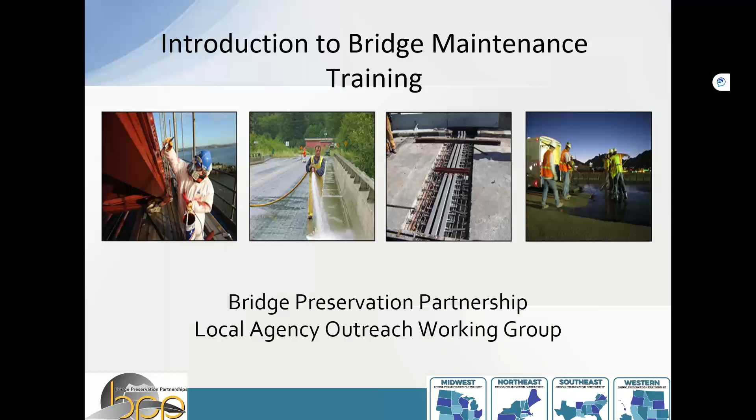I guess I should start with apologies for the last attempt at this. We had actually set a goal to break the software, and we didn't think we would actually achieve it. We had enough attendees log on last time that it exceeded what the software could handle, and it shut down. So we have a new platform today, and we should be off and running.

Just some housekeeping: as you've probably noticed, you do not have the ability with this software to unmute yourself, so we'll have to do the old texting or typing questions into the chat pod. There is a chat window and also a question and chat pod. We'll try to keep an eye on both, but using the question pod will probably help. You can see there's already quite a few in there.

The purpose of this training is to engage at the local level and hopefully provide topics that are of interest to you. I'm going to cover a lot today, pretty quickly, so I'd suggest you think about other topics you'd like to hear about, and we can bring those up later.

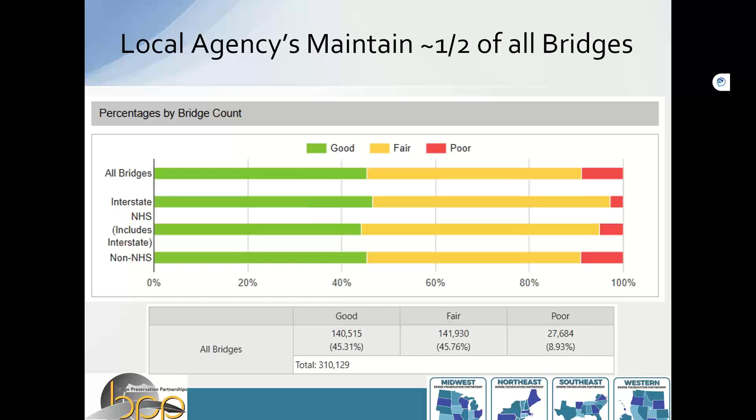If you look at the bridge condition trends for local agency bridges, this is for the NBI ones, so the 20 feet and greater. I should stop with that. The numbers I showed of the 300 plus thousand, that's only bridges over 20 feet in length. So if you have something that's slightly less than that, it doesn't even get counted into that number. But as an agency, you still are responsible for figuring out how to maintain it.

The number of fair condition bridges has steeply inclined, and the number of good conditions has stayed up there as well. So basically, we've added a lot more bridges to the inventory, and a bigger population of those bridges are in good or fair condition. So green is good, yellow's fair, and red is poor. Those colors repeat a couple times here.

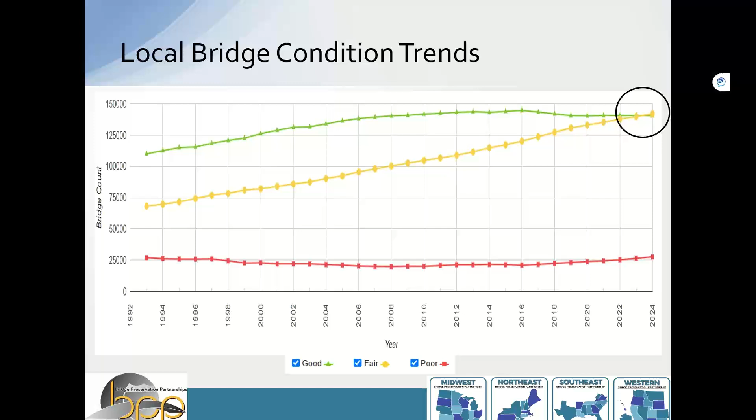So I'm going to define maintenance in just one second. Probably a lot of folks on this call have a clear understanding of it, but I find some folks don't. Generally, when we talk about preservation or maintenance, we're talking of just keeping what you have in good condition for as long as possible. We're not talking about taking those bridges that are in very poor condition and fixing them, because usually a new bridge is what you get with that.

So this graph helps you think about what bridges are my good candidates for maintenance and preservation. It's usually those in good or fair condition where they're worth saving. They don't need some kind of heroic effort to keep them in service for longer. As you work your way down that condition trend, you might still want to save the bridge, but it might be more of a large scale rehab project where you're having to touch most of the bridge and really put more work to it.

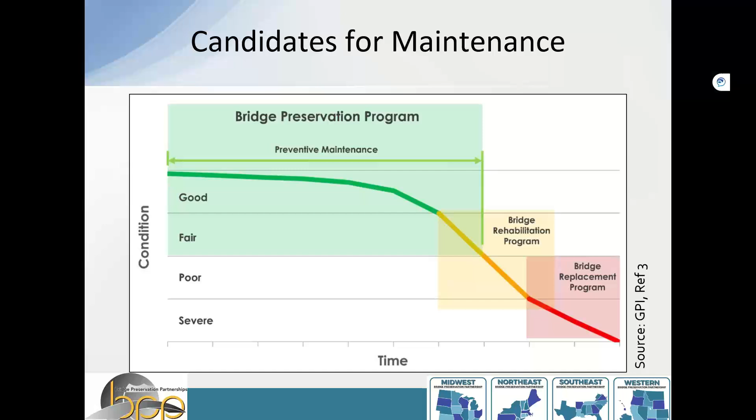So as I alluded to there, what's the purpose of maintenance, right? Maintenance is not all of the wish list stuff, as I like to call it. Maintenance is not, well, we need a wider road to fix congestion, or we need more ADA ramps, or more mass transit, or more rocket ships to the moon. I swear there's lots of different things people look to maintenance to address for us. That's really not the purpose of maintenance.

Maintenance is to keep what we have in as good a condition as we can for as long as we can. And when I try to relate maintenance to folks outside the field, I find using a car analogy is really helpful, because when people think of bridges, they don't think of maintenance that often.

The bridge was built, it's there, and then someday it will be replaced. But in between those two activities, there's a ton of work that needs to happen. And if you use a car to break it down to folks, a lot of them will get it. With a car, maintenance is your oil changes, your washing, your tire rotations, all those things that just keep the car in service, right? They're not improving the car, they're keeping it in good condition as long as you can.

And then you go to the other side there, your rehab is that engine rebuild. When you're not maintaining your car properly, you have all these consequences of expensive things you have to do. And then you go all the way to the other end where you have your car replacement, where you just go buy a new one. You could technically skip the maintenance and rehab step if you had the money to do so, right? You could buy the car, drive it around for as long as you can, do zero maintenance on it, and then once the tires wear out or the engine explodes, now you're going to replace it, right?

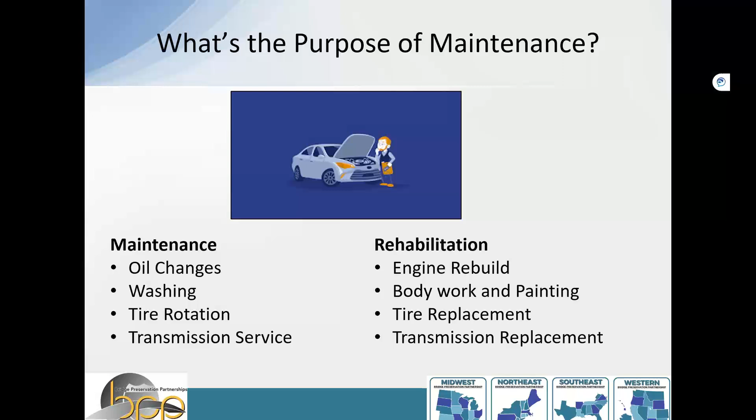And a lot of times folks look at our bridges that way, where it's like, I built it and I'm going to wait till I replace it. What do I need to do in the interim? There's a lot that needs to be done, so we'll cover quite a bit of it today. So when we talk about bridge maintenance, here's a laundry list of some of the things that fall into that category. I'm going to hit quite a few of these during today's overview. This is high level, but we're going to give you a lot of the tools you need to start some of this work now, and we're also going to point you to resources where you can find more details on how to perform this work.

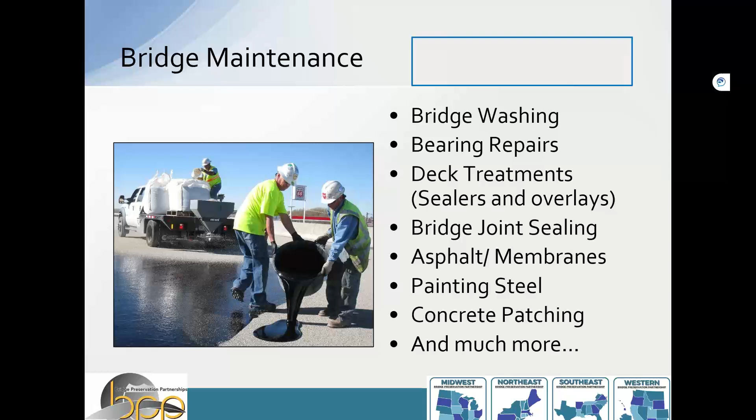But bridge maintenance is simple. You're washing the contaminants off the bridge. You're maintaining your bearings. You're doing deck seals and treatments and overlays to maintain the riding surface on the bridge. You're going to maintain those joints on the bridge deck that keep water and debris from getting down below. A lot of bridges have asphalt or membranes; you're going to take care of those. Steel needs to be painted to keep from corroding, so painting is a big part of maintenance. Concrete patching, bridge drainage maintenance. There's tons of different activities that fall into maintenance, but these are some of the more common topics.

So a lot of the content we're going to share today is coming from these preservation pocket guides. You'll see that there's quite a few QR codes throughout. If COVID had one silver lining, it's that these QR codes have become a little bit more useful. You can scan these and it'll take you to these preservation pocket guides. All these links take you to our organization's website, the TSP2 or Bridge Preservation Partnership. We're going to go into more depth on these pocket guides, but they're a very, very useful tool.

These guides were developed by a lot of the folks that I listed off in that first slide: folks that make the products, folks that talk to owners about how to install the products, and folks that actually do the installation, all working together to put together a guide saying we just want these things to work, right? The person that sells the product doesn't want it to fail early. The person that installs it doesn't want it to fail, and the person that owns the bridge doesn't want it to fail. So putting these three together really makes a difference on extending the life of the bridges, or getting good quality products out of what you install.

So the intent of these guides is really an installation guideline. It's meant for the person that's out in the field. It's going to list equipment and tools, some limitations and considerations, like when should I do this kind of maintenance activity? It's going to talk about if you need some training, although a lot of these are items where you could just grab a crew and start working right away. If there's any kind of technical support, some activities where maybe you need some engineering involved, these guides will try and flag it for you. And then some quality control considerations.

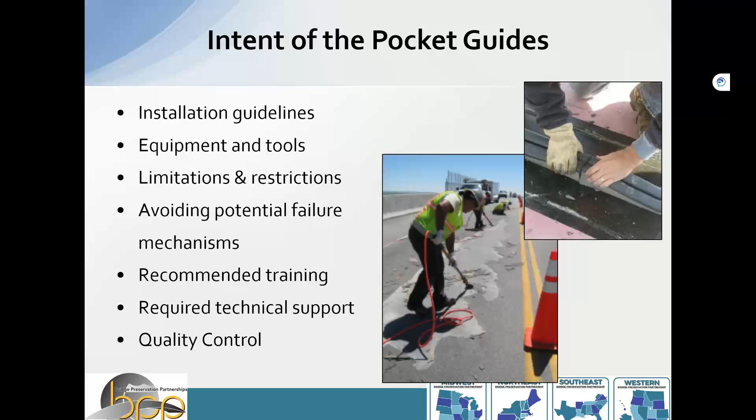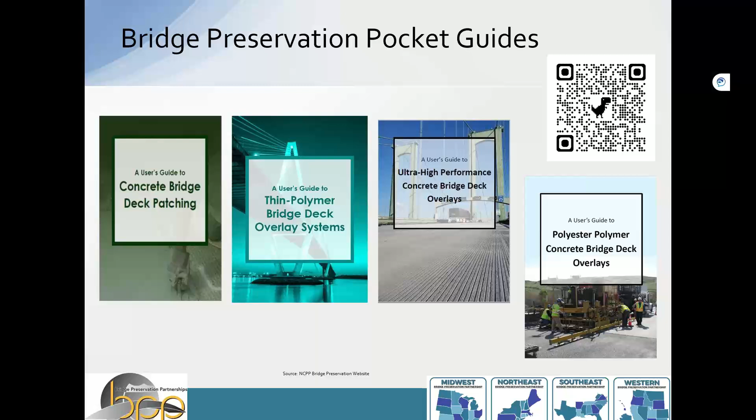I know I left quite a few off, but if you scan that QR code, and I think it'll show up a few times before we're done here today, it'll take you to where you could print these out. You can do them in PDF and have that information with you and take it out in the field as you're either inspecting someone else doing the work or you're doing the work with your crew.

You can also download it. Some of these, not all of them I think, have Android or other applications that are available to download and be interactive, where you can have checklists and different things that you're using. They're really a cool resource.

This is 100% free. In fact, everything I'm telling you today is all free, right? We're not trying to get any money out of anyone or sell anything. I don't own stock in bridge preservation. We're just trying to spread the word, right? A group of folks put a lot of work into making these, and we just want you to know that they're available.

So we're going to walk through some of these. Bridge washing, right? This probably sounds like one of the simplest activities that you can do. It has a huge impact on the service life of your bridges, particularly in regions where you have a lot of de-icing salts or a lot of debris that accumulates on your bridge decks. Washing that off can make a big difference in how long it lasts.

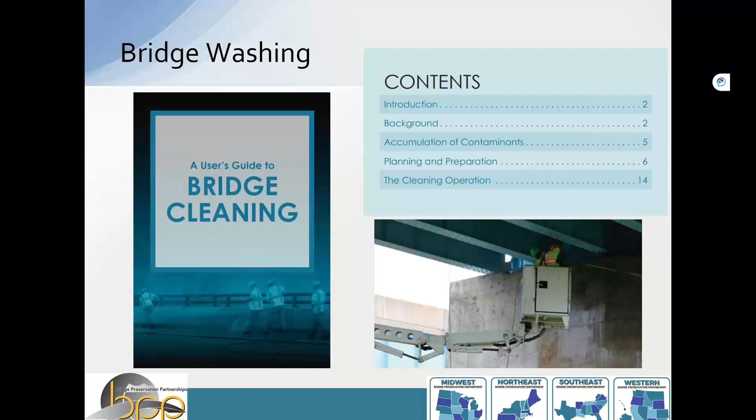The benefits are that flushing and washing reduces the potential of those salts or de-icers getting into your bridge deck or your beam ends or other locations. It's essential just to get the debris out for a lot of your bearings and joints to work, right?

You get all that dirt and rock packed into where your bridge joints are, and I've actually seen where it's either broken the bridge itself or broken some reinforced concrete paving coming up to the bridge, because when it gets warm, the bridge wants to expand, and it creates a tremendous amount of force if you don't give it room to do so. Cleaning can also help with your steel coating systems, keeping those clean as well.

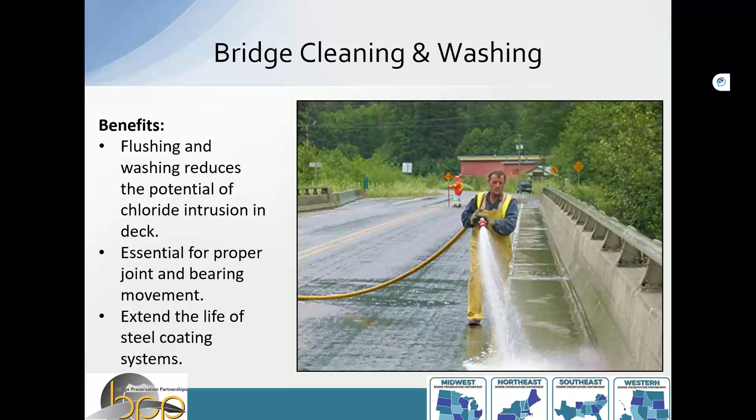So some of the things to focus on are decks, joints, curbs, and rails, that area where you're applying a lot of the contaminants directly. But then also look underneath those joints too. You have your abutments, your beam seats, and your bearings, right? If you kept your joints watertight forever, you wouldn't have any issues down below. But the reality is that joints end up leaking from time to time, so you can get a real concentration of contaminants at those areas. So it's something to look at also.

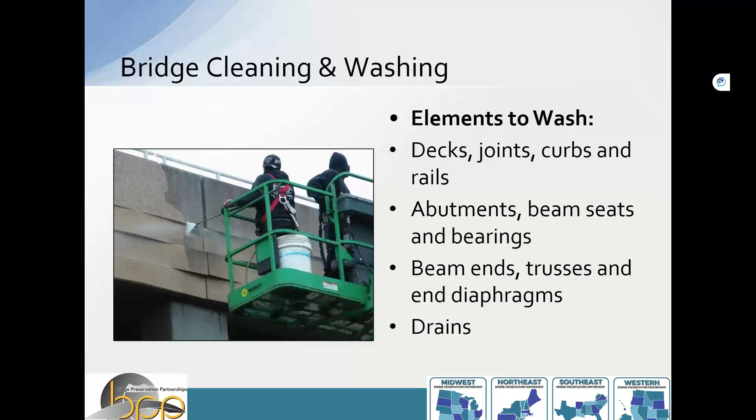It goes through some of the considerations, right? If you have a ton of debris on your bridge, you're probably going to need to remove some of that with hand methods first and collect it before you flush it. That's usually an environmental consideration, and so there are some environmental regulations that you need to think of.

I look at bridge cleaning, at least in the Northwest, as being a real success story for this preservation partnership. I used to work at Oregon DOT, and attending the partnership, we would hear from all the other regional partnerships.

Washington did this great study where environmentalists had kind of shut down, through the permitting process, the ability to wash bridges. They didn't quite say you can't—they said you can wash your bridges, you just need to collect 100% of all the water you use while you wash your bridge. Well, that turns it into a pretty significant effort, right? If you're trying to clean off a bearing or beam seat like this and you have to figure out a way to collect all of that water, that's basically telling you not to wash your bridge.

So they did this research study where they measured contaminants. They followed these best practices: picked up all the big debris, then flushed during high flow situations where the stream already had a lot of water going down it. They said, measure contaminants upstream and downstream of us, and if you can tell a difference, we won't do it anymore. That kind of pioneered a program for permitting, saying that they couldn't tell a difference. So if you follow these best practices, you can start washing your bridges again.

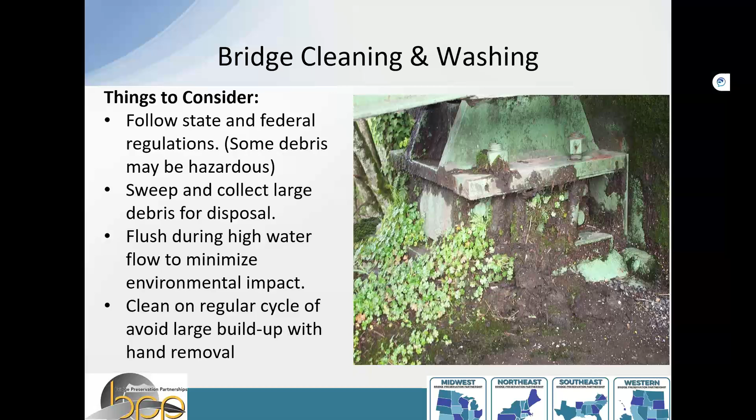So underneath the bridge joints, you've got bridge bearings. There's a really pretty cool guide on this one. I've done quite a few bearing maintenance, repair, and replacement jobs in my career, and I'll say there's really nothing cooler than when you get to jack a bridge up, pull it out, and put it back in. There's just something about lifting something that heavy that's really pretty cool.

This guide's got a lot more considerations to go through, but again, like all the guides, it tries to take you from beginning to end. The whole thing is still only 19 pages, so it's not like they're handing you some crazy research thesis that's not particularly useful. This is walking you through basic steps and considerations to maintain your bridge bearings.

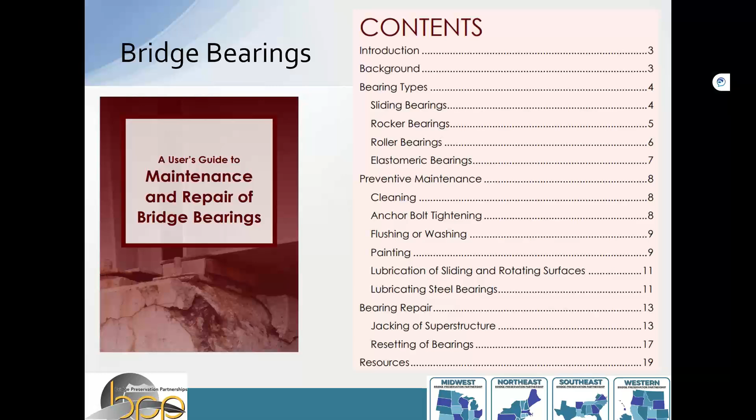So the guide will start with, and we will too, a description of what is going on with these bearings. Up there at the top, you've got your steel beam coming down, sitting on this sole plate, which is then sitting on a sliding plate, which then is on a masonry plate—just a big steel plate that helps spread the load out before it gets back into the concrete abutment or pier cap. This is an example of one that's actually in fairly good condition.

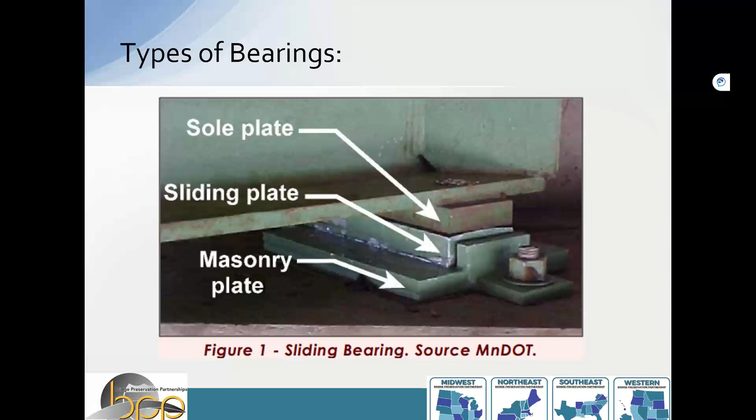The whole point of all this is just to allow the bridge to expand and contract as the temperatures swing. If it's not restricted while it moves, everything works well. If things get bound up or frozen, the forces are tremendous, and you'll actually start to see either those anchor bolts shear off, or you'll see the concrete underneath them go, which can get pretty scary pretty quick as you start to actually fail what's holding your bridge up.

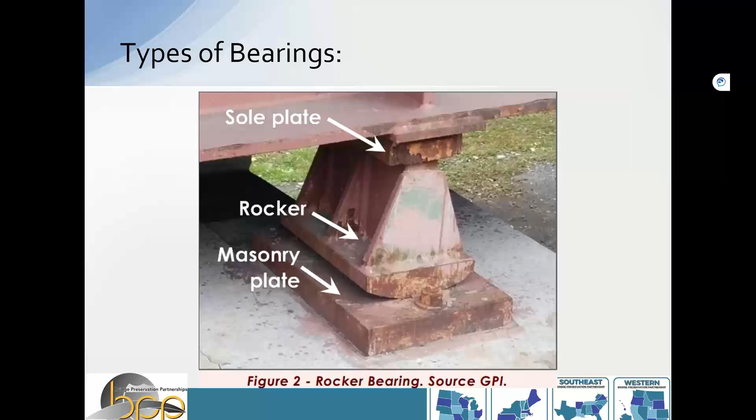Another type of bearing—this is a rocker bearing. So a similar application, but instead of sliding back and forth, this one just rocks back and forth on a pendulum. A different type of bearing system, but trying to accomplish the same thing.

And a roller bearing—another movable bearing system, but this one has a cylinder that allows things to move back and forth on top of it. I could see, actually, this is from the guide—there's a pretty good spall of concrete right above it, you can see where it's that rough end. So I'm going to guess that this one probably had a leaking joint above it at some point, which could have resulted in some damage.

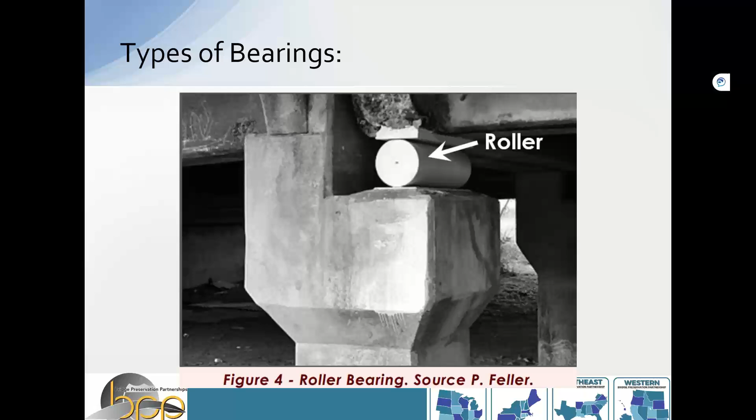So those are your different types of bearings. Cleaning is one of the main things that we like to go after with these, just to maintain them as well as you can.

If you get to do a bearing replacement, it's a pretty good effort. I'm biased, I know it's a cool project to be involved with, that's fun, but if you can just clean it, it's going to be a lot less work for everyone, a lot less cost. That's really the whole point of cleaning, just to keep it from rusting or deteriorating and to keep things moving so that you don't start to break stuff.

Anchor bolt tightening. I actually caught in the chat pod that there was a note that one of those anchor bolts looks loose. So the guide actually talks about that. If you have loose anchor bolts, it could cause damage to other components as well. So retightening those anchor bolts is directed. That's something to keep an eye on.

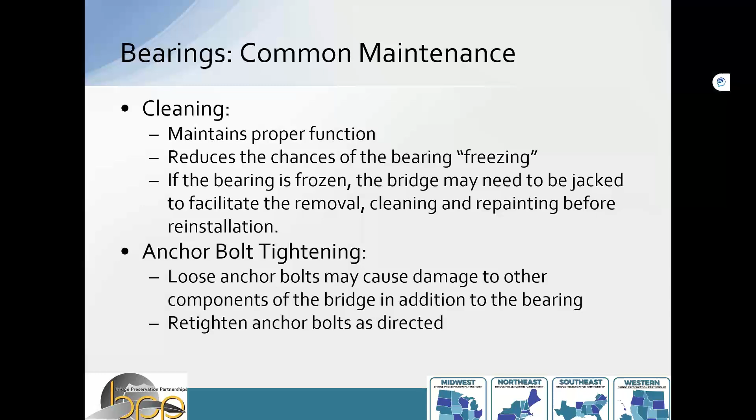This is the before picture of a bearing painting, and I'm going to flip to the after, because I had to do this a few times before I really believed this was the exact same bearing. But this is before, and you have those plates that are supposed to be sliding on top of each other, right underneath that girder. What happens is when it hasn't been cleaned and the paint has failed, that rust starts to really freeze things up. You can actually put gauges on the bridge and measure it, but it starts generating really high forces in those girders, in the substructure below it, and in a bunch of bridge components that were never intended to take those loads, and they can create real problems.

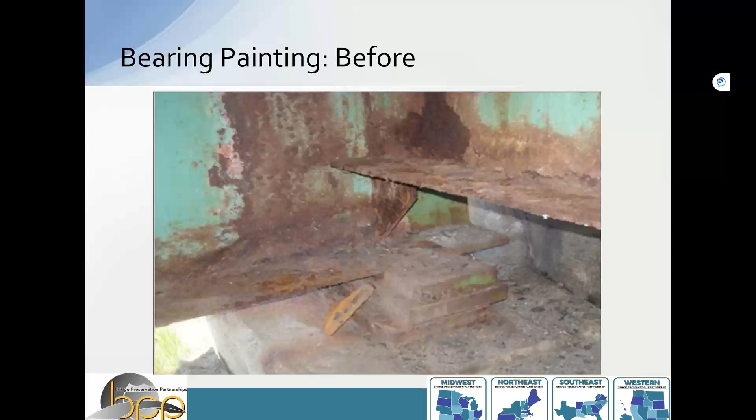And so this is after painting, so it has been cleaned and painted to allow for some movement to occur again.

Cleaning and painting is one aspect of bearing maintenance. Many bearings are actually designed to be lubricated as well. It depends on the bearing type. Some bearings have grease fittings in them. I don't see those installed in modern bearings as often, but you see them in some older bearings, where the intent is that you can get in there and re-lubricate the bearings with grease on a regular basis. Some lubricants really try hard to penetrate between those surfaces to get in there and help things move again. But if you really want to get lubrication across the surface, you're probably going to need to lift the bridge to get that clearance.

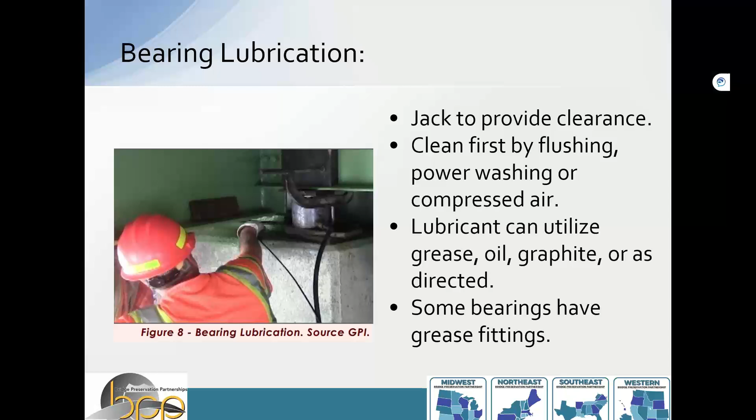And there's some discussion on bridge lifting too in the guide. Typically, if you're going to lift your bridge, it's time to probably call an engineer and get a plan together for how to do it.

One of the challenges we often face is that these older bridges were built and intended to be replaced after 50 years, and there wasn't much thought into the fact that maybe you'd need to replace these bearings at some point. So you have beam seats that are about as wide as the bearings, and when you try to find somewhere to put your jacks, often there just isn't a spot that was thought of to have that. Most bridge codes now require you to think of that ahead of time and provide a plan or at least some detailing to allow for jacking.

But this is a case where you can see there's a big steel bracket that was added so that they could get enough leverage on that girder to actually lift it.

Some of the things you have to think about when lifting is that if you try to lift just one beam, then everything connecting that beam to the rest of the bridge is now fighting you and taking loads it probably wasn't intended to take. So usually you try to lift all the beams at once. Things like bridge skew matter too. If you have an abutment at a really steep angle, that's a pretty good red flag that it's going to struggle to lift uniformly. It's going to have some problems.

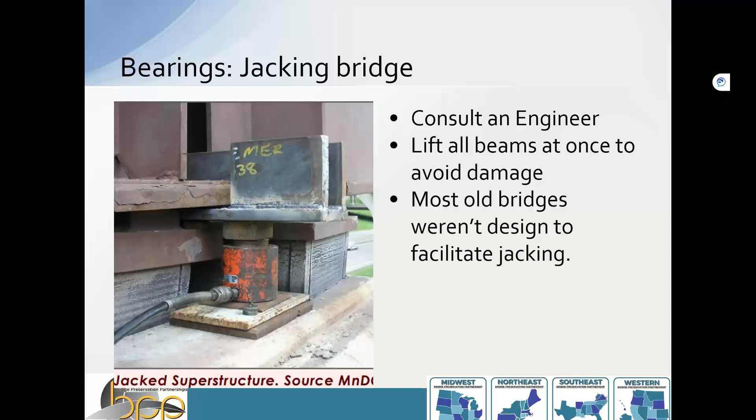There's just a lot of things that go into jacking, but I've definitely had the pleasure of working with several bridge crews that have partnered together and lifted, replaced, and maintained their bearings. So it's definitely not outside the realm of something that falls into maintenance that can be self-performed, even with the proper training.

In that situation, you're going to have to lift the bridge and jack it to get that bearing back into place. Then the question is, how do you keep it from walking now? Usually it's a function of how heavy your bridge is that determines how much that bearing's going to stay. You don't want to make your bridge heavier, so you can do something called a keeper plate.

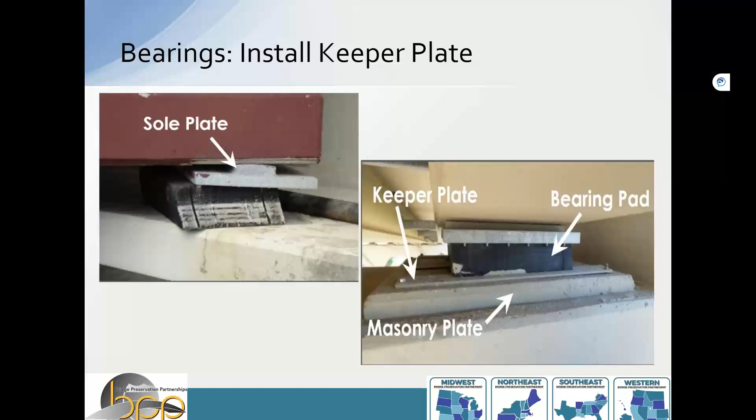Here's an example of one that was repaired with a keeper plate. It's just a little steel bar in front of it, enough to create a lip that'll keep the bearing from leaving. Those are just anchored down.

One of the biggest actions that can extend the life of concrete bridges, and there's concrete on just about all bridges, is to seal it. Why do we seal concrete? Concrete itself doesn't really care about moisture and contaminants, it's the reinforcing steel inside the concrete that does.

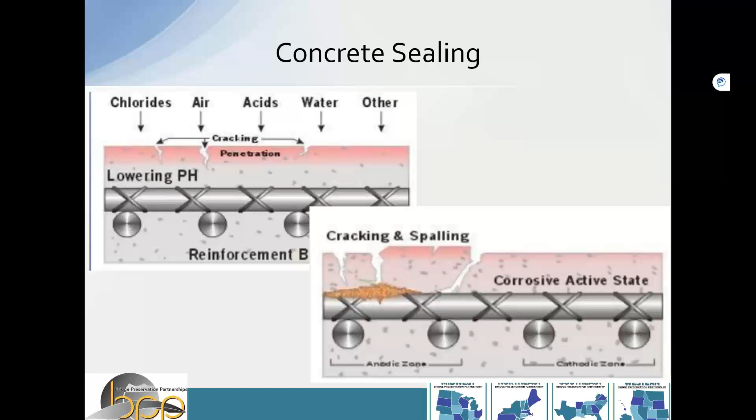So sealing your bridges, or sealing concrete, is one of the easiest ways to extend the life of your bridge. Bridge deck is usually what we refer to, but certainly your rails are another culprit that can get a lot of exposure. If you have leaking joints, sealing things like your beam ends and the abutments underneath can make a big difference. There are tons of different products out there to seal, and some of them have different purposes.

It does not fill cracks of a certain size, so it's not really a crack filler. And then it's something you're going to reapply on some kind of a cycle.

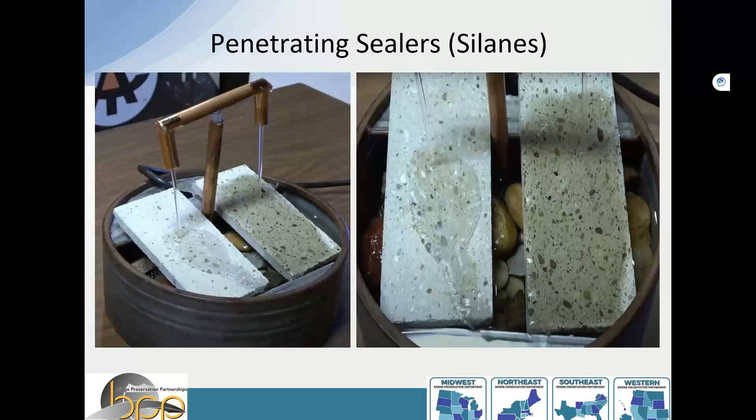The one on the left has been treated with a silane, and on that one, the water just beads up and runs off. So a very simple demonstration, but it shows how something put down with just a spray bar can make a difference. So this is the spray bar that puts it down.

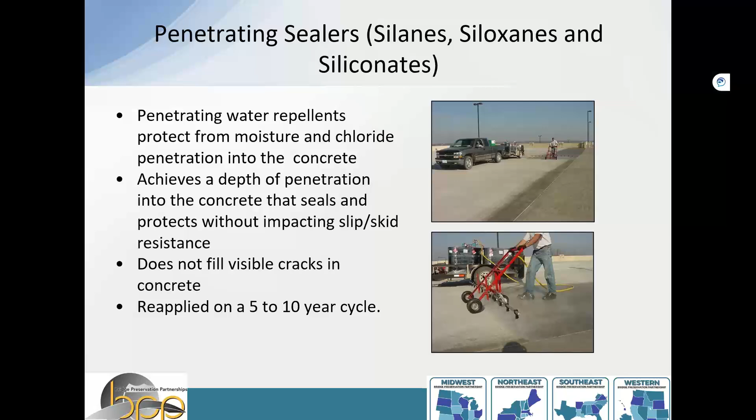Concrete absorbs it. It doesn't really change the appearance, and you can see it here just because it's still wet. Doesn't change the skid resistance. It goes down really pretty simple, you just spray it on. You gotta, with anything, talk to the manufacturer about the application rate for that particular product. But low tech installation, just a spray bar, and you get those kind of results.

Other types of sealers are intended to actually go after the cracks, called crack fillers. These are typically low viscosity products like methacrylates or epoxies, poured onto the bridge deck, and you use brushes or squeegees to move it around and help it sink into those crack areas, filling the cracks that are that real quick avenue for contaminants to get down to the reinforcing steel.

These are most effective when placed early. Unfortunately, a lot of our bridge decks crack right after they're built, and some of it has to do with concrete material properties. There's been a lot of research to try and make it better, but my experience has been that once you get a brand new bridge deck, you think you're good, you don't have to do anything there for a little bit. But go out and look at it. Sometimes it's good to get that crack sealing applied maybe a year or two after it's built to seal those cracks and get more life out of that bridge deck.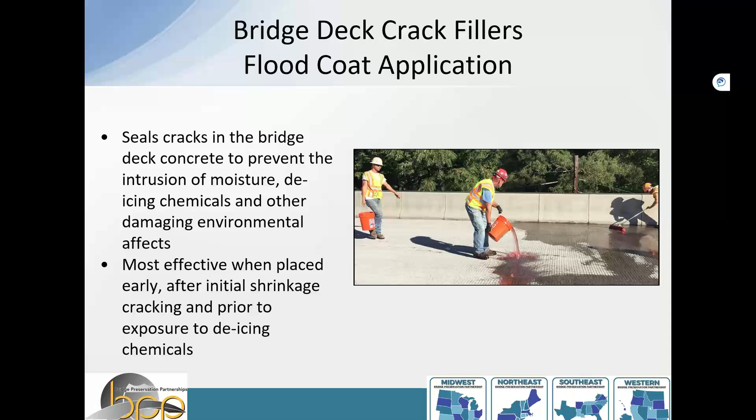These also need to be reapplied on some kind of a 5-10 year cycle. One thing to think about is you're not building an overlay, you're not protecting the whole bridge deck surface. This really goes into the cracks, and then the surface will wear off fairly quickly, where it can still work its way through that porous concrete like we saw with that silane solution. But it certainly has its place. I've actually heard some folks experimenting with doing both types of treatments together to try and really maximize that crack filler hydrophobic combination.

Here's another guide on thin polymer overlays. This is actually creating a new overlay system on top of the bridge. It makes a barrier to keep all that water and salts out. These go by different names, but polymer overlays or epoxy overlays seem to be some of the more popular terms for them, but they're really fairly thin, about 3/8 inch thick when it's all said and done. They're something that can be installed without a lot of equipment or training.

Thin polymer overlay systems have very low permeability, so they protect the whole bridge deck against intrusion of moisture, de-icing chemicals, and deterioration. They do actually provide a new wearing surface. In particular, when they first go down, you have all that new coarse aggregate that gets embedded into the polymer, and it really drives the skid resistance up. They, of course, like most overlays, will wear over time. They're typically considered a fairly low-cost alternative to some of the other overlay types out there.

And they can definitely be easily installed with maintenance crews. I actually saw a presentation once at a maintenance conference where there was a very motivated county engineer who wanted to start doing some overlays, but he didn't have any maintenance crews at all and didn't have money to go out for contract. So he got together with the inmate crews, got the equipment they needed, and they successfully installed overlays together with that system. So where there is a will, there is a way.

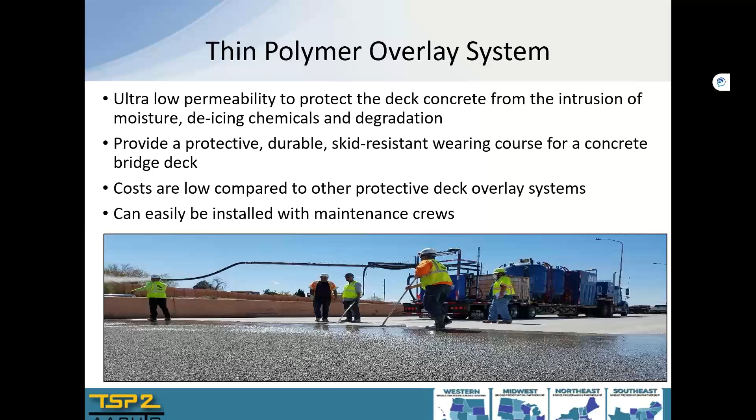As with any treatment, one of the first things you need to do is look at prepping the bridge deck. Typically a shot blaster is the way to go on this. There's an example of a ride-on shot blaster. What this does is it removes all the contaminants from the surface. Basically the shot blasters fire steel beads at high velocity into the deck and then vacuum up the debris behind it, cleaning the deck and creating that roughened surface for the epoxy or polymer to bond to.

The picture on the left is a smaller scarifier, like a walk-behind device. Obviously buying a shot blaster is probably not something a maintenance crew is going to do, but if you work with one of your local concrete cutting companies, it's usually fairly economical to have them come out and do that for you. Or if you have a small scarifier, you could probably achieve a similar result. What you see over there on the left is them going back through and cleaning up some of the areas that maybe were missed by the shot blast.

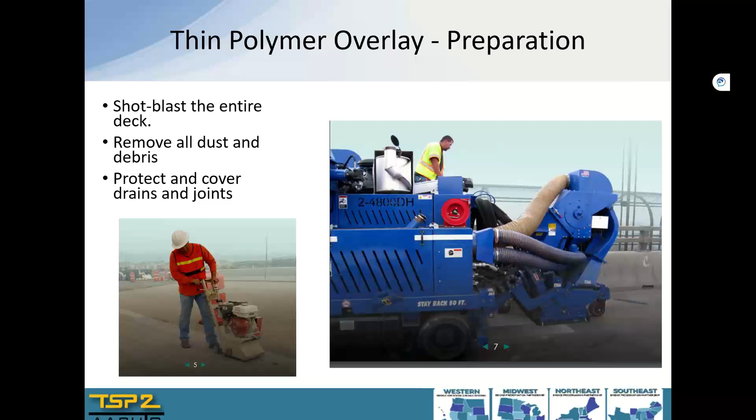Once you get your deck prepped, you're going to mix the polymer. Typically it's a 1-to-1 ratio, but follow the manufacturer's instructions. That first picture is basically a trash can they're mixing in, with a Jiffy mixer that the gentleman on the left is holding, and 5-gallon buckets to separate things out. They're actually mixing on site, doing it in fairly small batches, because depending on temperature, this stuff starts to take off and harden fairly quickly. So usually you do a lane at a time in smaller areas, and you work your way across the deck.

Once you get things mixed up into that bucket, I would be remiss if I didn't highlight this: mixing is very important. Use a timer. I know one supplier who brings out his own paddle and his own timer to all the projects, because often they'll show up with a mixer, but it's not the right paddle. It's not that the right paddle is hard to get, it's just that they think, well, what's the difference, right? Well, mixing's important, so I'll highlight that on behalf of Greg. Mixing's important, but not high tech. Use a timer, use the right mixer, get it into that 5-gallon bucket or the larger bucket, and then you start pouring it out on the deck.

That photo on the bottom shows using squeegees with notches on them to spread the material out to the right depths. Then you broadcast aggregate over the top to refusal, give it a few hours to cure, sweep it off, and repeat the process. Think of it as two really thin coats of polymer and aggregate to create a 3/8 inch surface when you're all said and done.

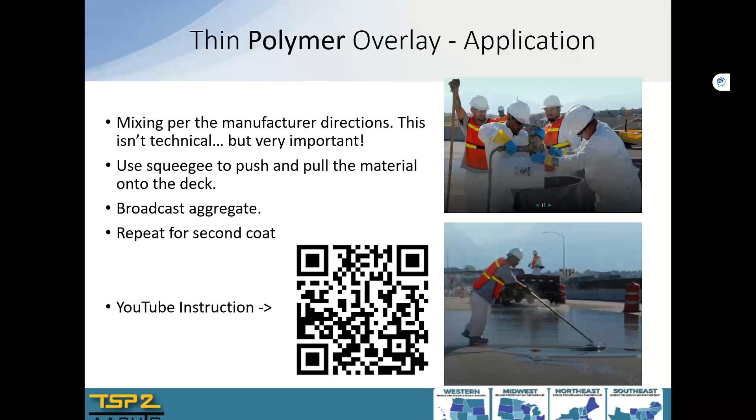This is usually stuff that's all short-term traffic control, so you can close down one lane, do that lane, and then switch traffic over to the other side and do the other lane. It's stuff that can be done overnight. Temperatures do make a difference in how fast this stuff goes off, so when it's cold out, it may take longer before you can put traffic onto your lane or reopen the bridge. But definitely cool stuff, good tool in the toolbox.

Asphalt, a lot of bridges have asphalt on them. Sometimes we think of the asphalt as being the overlay or protective system, but that's not very accurate. Asphalt's actually very porous, like a big sponge, so it actually holds and traps moisture and contaminants on the bridge deck. It does protect it from wear, because you don't have the tires directly on it, but generally asphalt itself is not really helping to save the concrete and reinforcing underneath it.

What you need to do is pair the asphalt with a membrane. Lots of different membranes on the market out there. There's polyurea, spray-on membranes, which I liken to spray-on truck liners, very durable. There's polymer membranes, actually very similar to the overlays I just showed, you install it first and then put asphalt over the top. And then there's fabric and rolled membranes, and mopped-on membranes. Lots of different options out there.

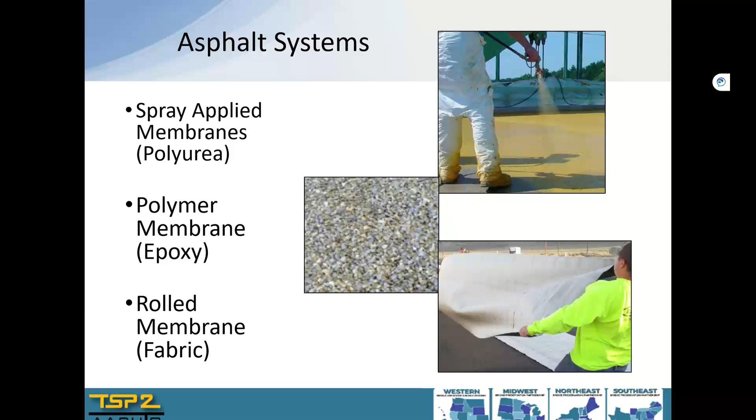I'm just going to highlight the fabric one because it's fairly straightforward for maintenance to actually do as part of a paving operation. So this is it going down here, it's a rolled-on, fairly durable material, and you can see they're overlapping seams, trying to work from the low end to the high end so that water helps go. Because although these membranes really do adhere well, getting them perfect is a lofty goal, so you have to think ahead about how you're going to overlap these seams and seal things up.

But this one product here is a peel and stick. So basically they lay out the length that they're doing, and then you can see that blue film being pulled back from underneath it. They pull that off. Some of the overlays or membranes get rolled down. You got to look at your manufacturer's instructions. The idea is that you're building in that impervious surface into the asphalt so that you don't get the water all the way down to your bridge deck.

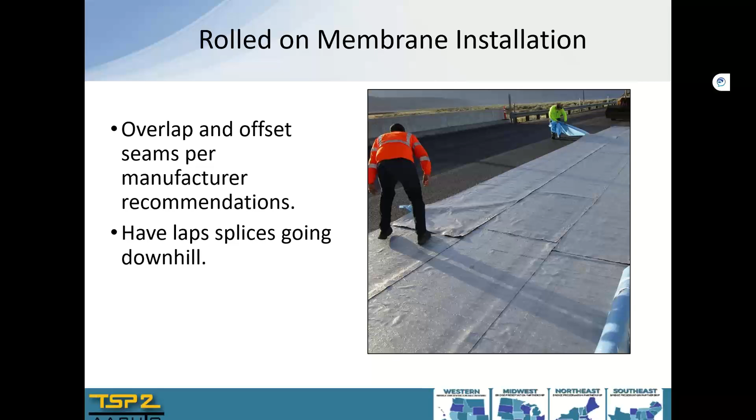This particular application here, if you're wondering where the concrete is, it's a sandwich membrane. So they put a leveling course down of asphalt on the bridge deck. Then they put the membrane down so you had that nice smooth surface to put the membrane on. And then they went ahead and paved over the top. There's also lots of applications where the membrane goes directly on the bridge deck.

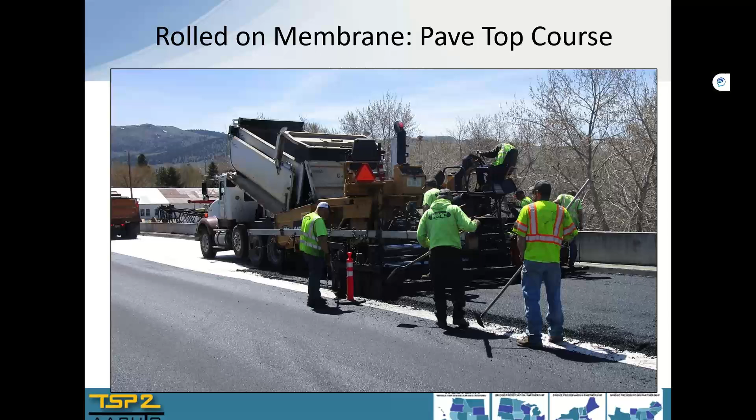Bridge maintenance painting. So painting is another big action. Typically when you get into like full scale, we're repainting the whole bridge, it starts to get beyond what we would call maintenance, because that's a pretty expensive, pretty time-consuming project. Not to throw the gauntlet down, I know for sure there's maintenance crews out there that could accomplish this. But when we're talking maintenance painting, we're usually referring to spot or zone painting, where you're looking at these smaller locations.

Definitely with painting, you need to be very cautious of worker safety and environmental regulations. A lot of the coating systems that are on your bridges out there are toxic. A lot of lead-based paints. They worked good to protect the bridges, but are a pain now that it's time to remove them. You got to contain all that lead paint and make sure that your workers stay safe with respirators.

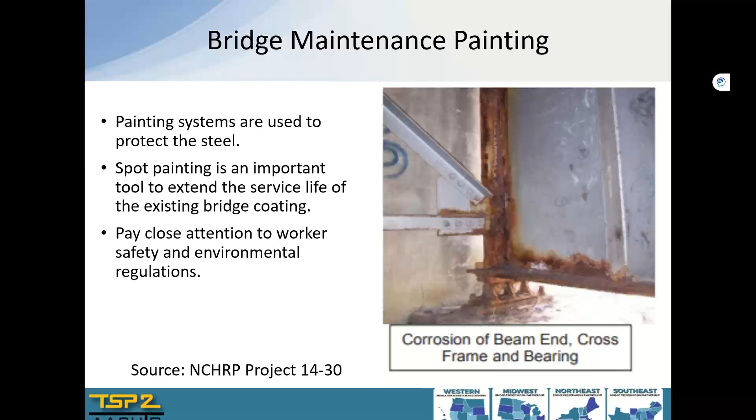So looking at candidates, right? If you're going to try and do spot or zone painting, it's usually where you have some localized failure. So this is actually out in the middle of a girder. It was done incorrectly maybe the first time it was painted, so you had this localized failure location. The photo I showed here, this was probably underneath a leaking bridge joint. So if you just painted the beam end and the bearing, you're looking pretty good and the rest of the girder looks good. It's pretty rare that you see the entire beam fail at the same time. So when you have these smaller areas, there are things you can do to go ahead and repair them.

Prep is very, very important. If you just throw paint over the top of failed paint or rusting areas, it's quick to do, but it's really kind of a waste of your time. So using some grinding disc or needle guns to go in there and clean the surface off is very important.

One of the things that you can see on the left is a vacuum shrouded backpack. What that is, it's doing your containment right at the source of generating the pollution. And that's really handy because when you see large painting projects, usually they wrap the entire bridge in a tent almost. Well, for doing your maintenance work, that's a lot of effort to go and wrap the deck. So if you can use something like this, then you can get back to using hand tools and addressing right where you're at.

There's recommendations in this guide on tapering the surface a little bit, so kind of feathering your coating, grinding off so you can kind of see the different layers of the coating here. The idea is to get that smooth transition from where you're repairing to where you're not, right? Because we're only going to do some spot painting.

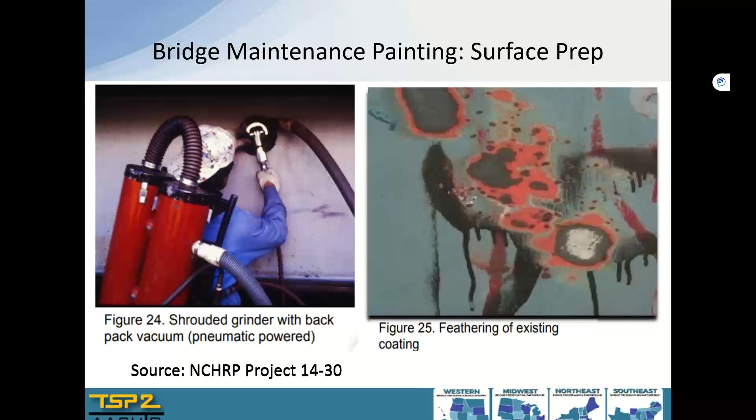Take a look at the guide if this is something you guys are going to jump into. Like I said, prep is important, and then applying the coating to the proper thickness and the proper number of coats is also very important, as well as picking the correct paint. A lot of agencies have a qualified products list that you can look at and just copy off of that. Oh, they use this for maintenance coating. It's probably a decent product for you guys to look at as well.

But more is not always better, right? I've seen some painting situations where it was just gobbed on and had unfortunately some early failures because it was just installed so thick it never cured properly, and it just was not how it was intended to be installed.

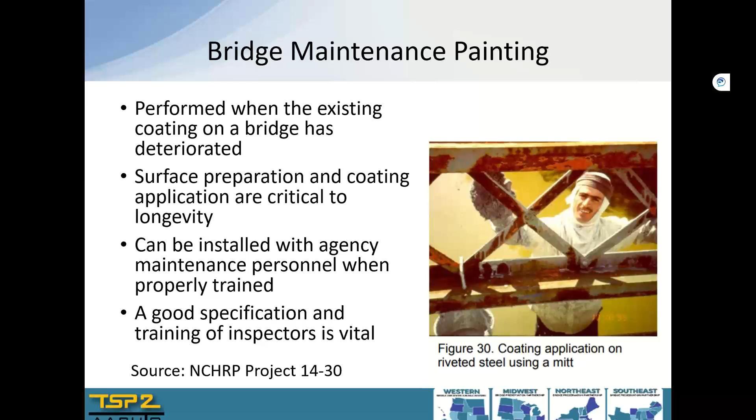And there's, I think if I say thousands, I'm exaggerating. There's definitely hundreds and hundreds of these training videos. They're put into different categories and put online. And so the thing with these training videos that's cool, they all just take you to links on YouTube. But this partnership's been happening for a long time for bridge preservation, and at all these regional meetings, folks give presentations and case studies on what worked and what didn't work. And these are folks that could be considered experts in their field.

And it gets recorded. The video gets put into these categories online in this video library that's accessible through the Bridge Preservation Partnership website. And then there's also a link to the presentation itself, so you can download the presentation if you want to see the slides. Very useful. There's also who gave the presentations there as well. So if you want to reach out to whoever it was, my experience has been that folks are excited that someone even looked at what they provided and are more than happy to offer some advice or some suggestions on whatever your particular challenge is.